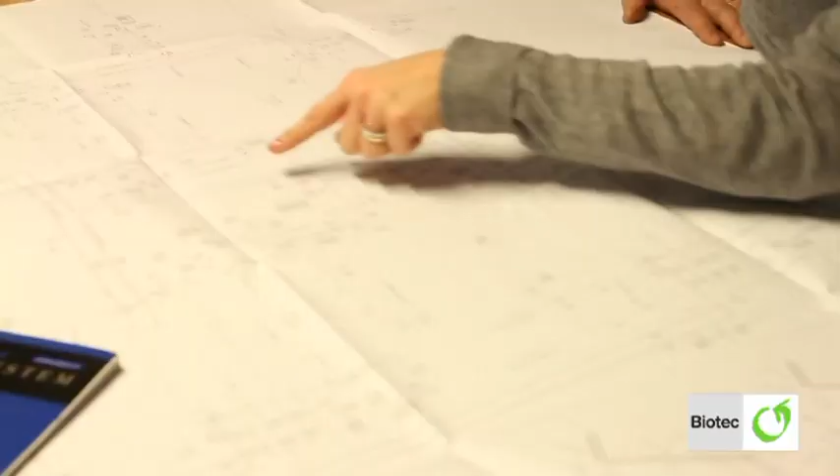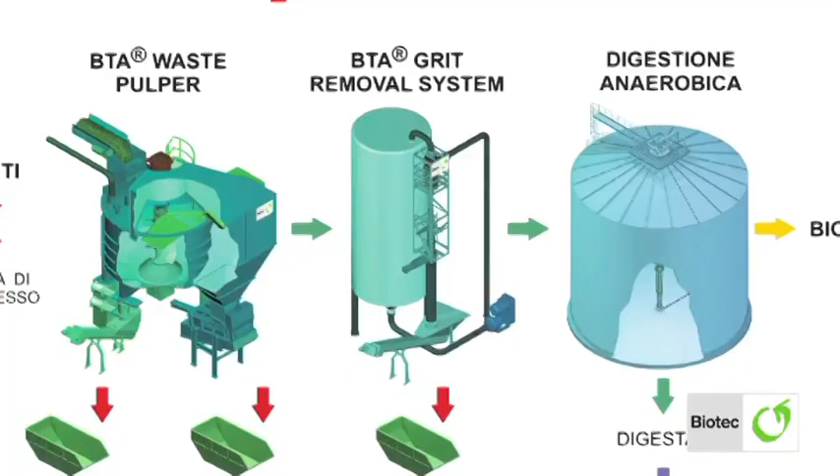Biotec Systems is a Genoa-based company which has been operating in the renewable energy sector since 1997, designing and building plants for biogas and compost production. The company's strength lies in the use of BTA technology, a patented mechanical biological wet separation waste treatment process, to evaluate the biodegradable component of waste and transform it into renewable energy and materials, thanks to an efficient pre-treatment system and the following biological process of anaerobic digestion.

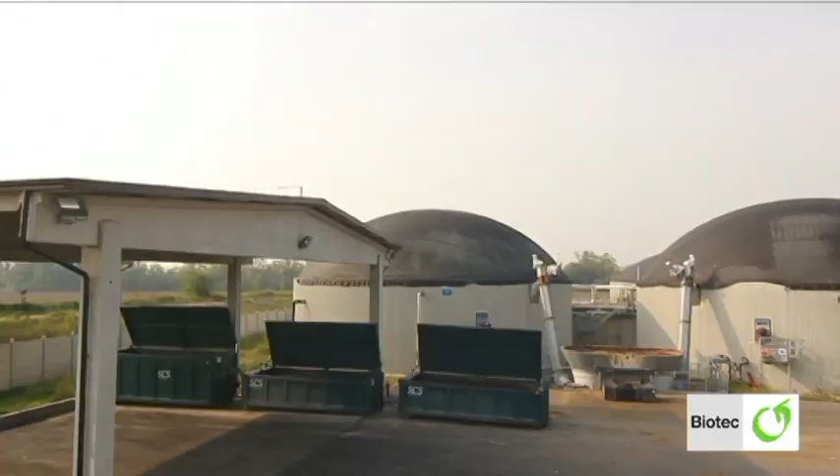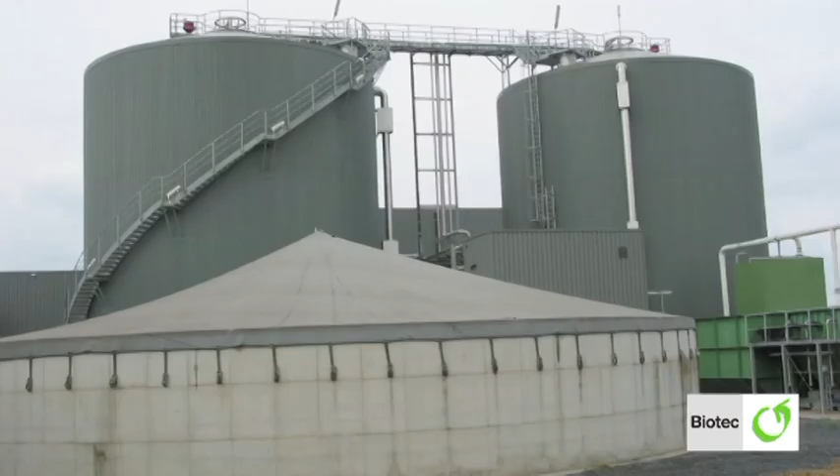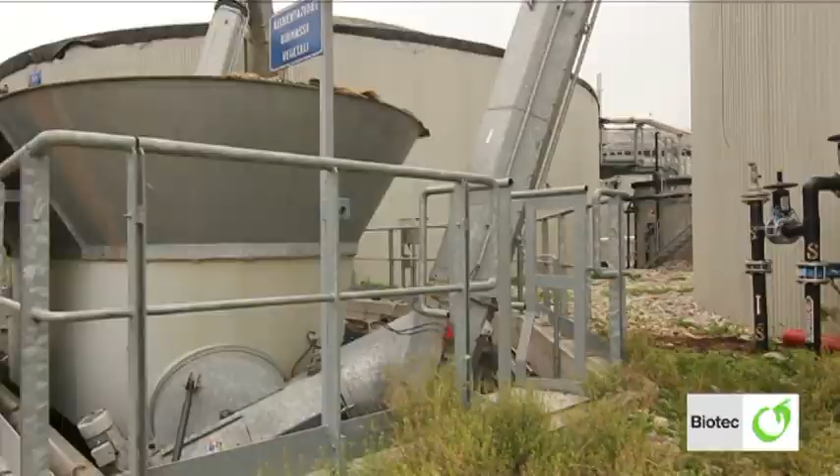Today, this technology has been installed in over 50 plants on all 5 continents, starting from Europe in Italy, Spain, Portugal, Great Britain, Germany, Poland, Belgium, Austria and Luxembourg, followed by Canada, Japan, South Korea, Australia and Libya. Together with Scamac and Ecomin, Biotec Systems is part of the BES network, dedicated to sharing resources and experience in the construction of plants and machinery, with the aim of increasing innovation and market competitiveness.

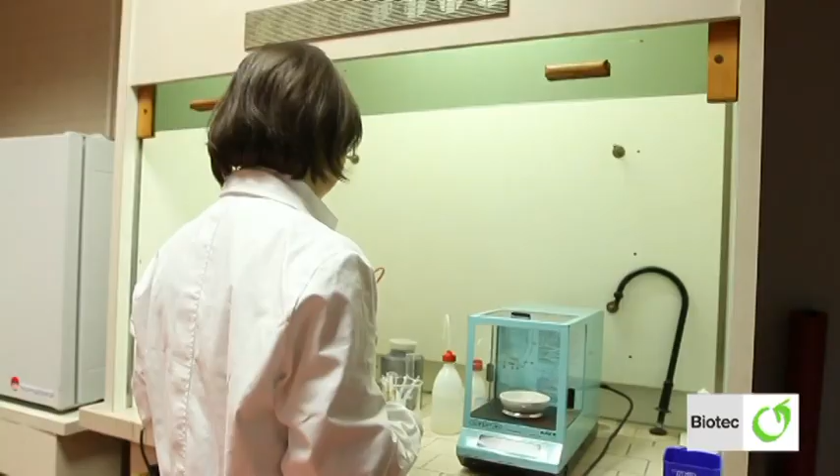Biotec Systems has developed its experience in collaboration with its BTA international business partners, a German company which made its first foray into the biogas sector in the 1980s. The close collaboration between these two companies has led to the optimization of the process, designed to evaluate the organic content of waste, which is then used to generate biogas, a mix of methane and carbon dioxide, in turn used to obtain high-quality compost and electric and thermal energy to put into the grid.

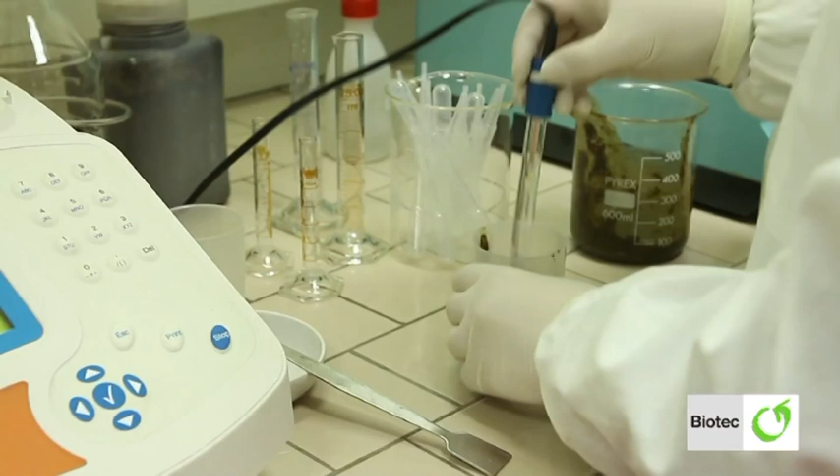In the plants designed by Biotec, together with the organic content of sorted recyclable materials, we can treat waste and byproducts from the agricultural and food sector, including packaging, from industries, butchers, markets, supermarkets and shops, as well as waste from kitchens, canteens and restaurants.

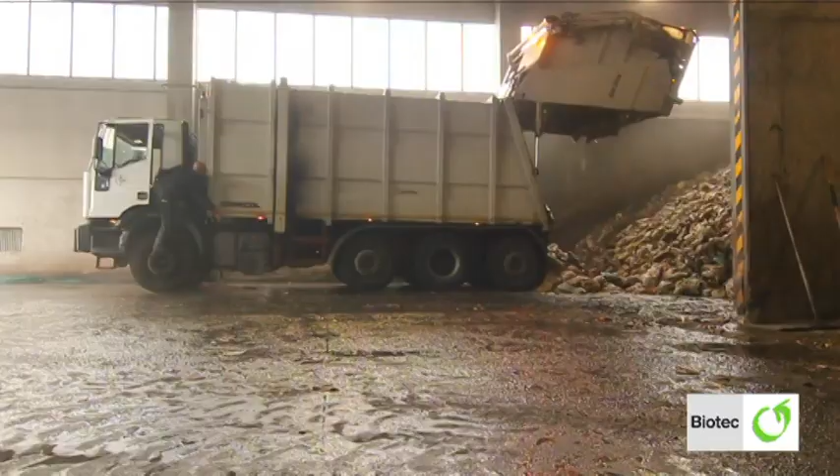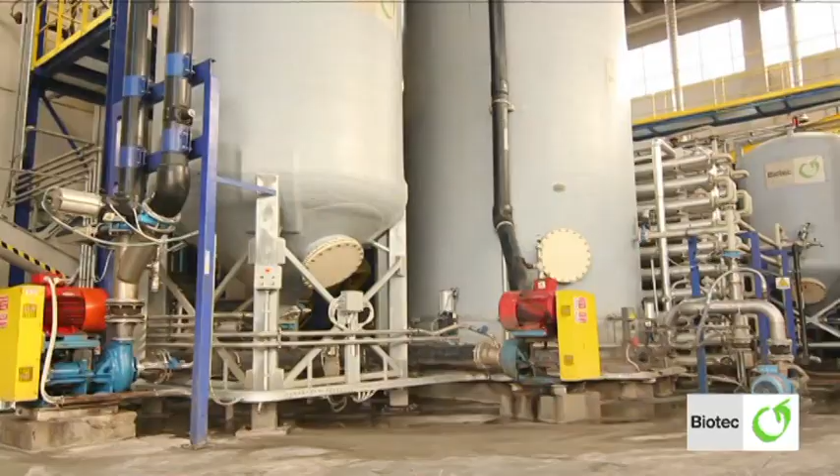To allow for an optimal production of biogas, it is necessary to precede the anaerobic digestion with a pre-treatment system to separate from the organic material the non-biodegradables, such as plastics, wood, metals, glass and aggregate composites, in order to avoid these having a negative effect on the anaerobic digestion and the efficiency of the plant.

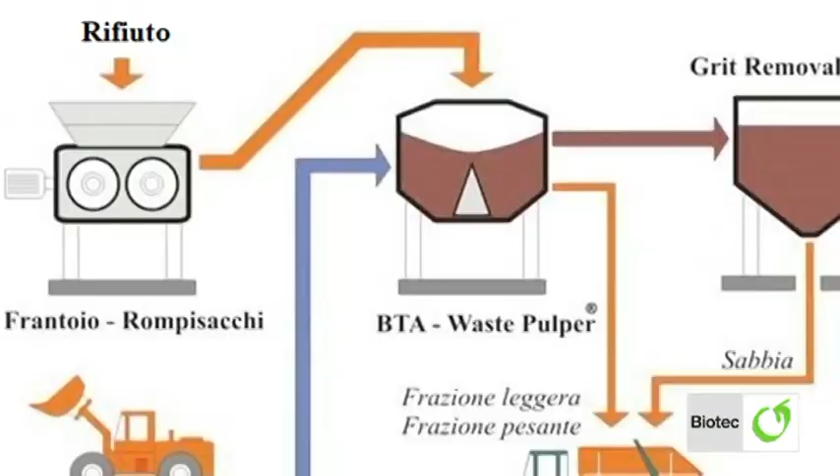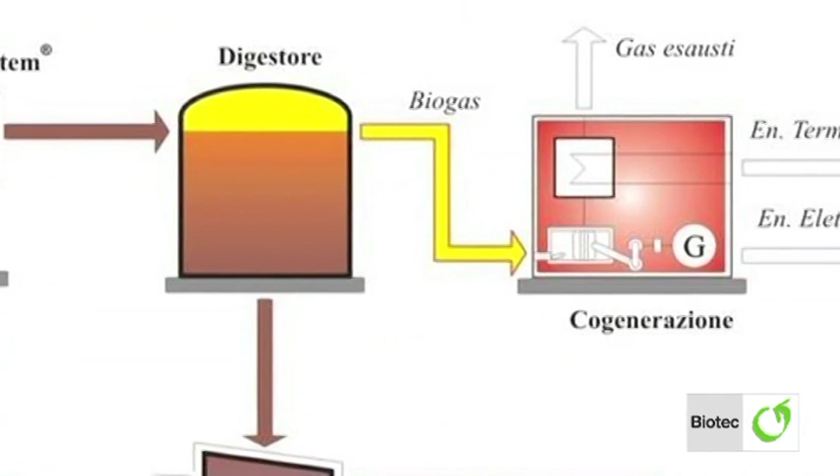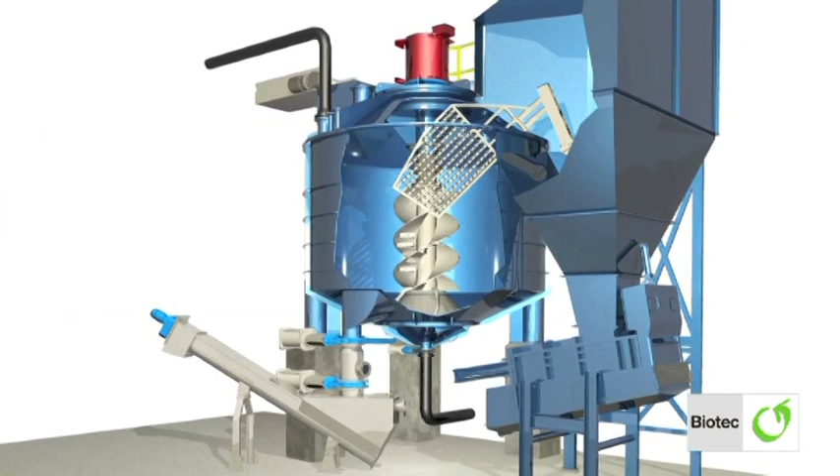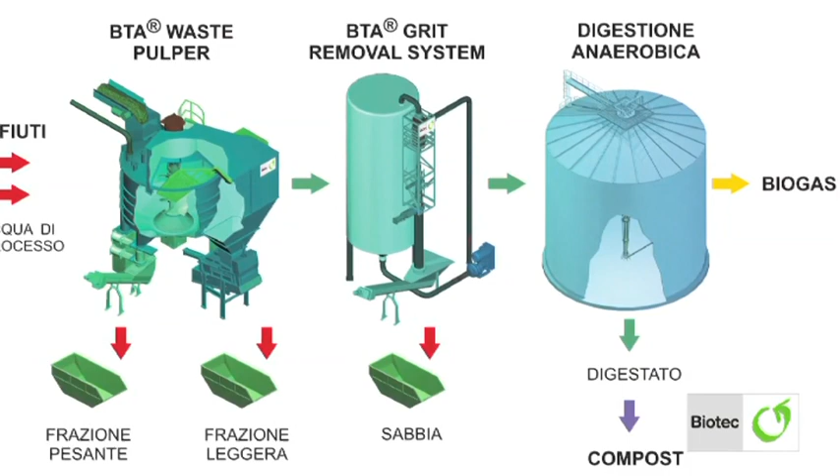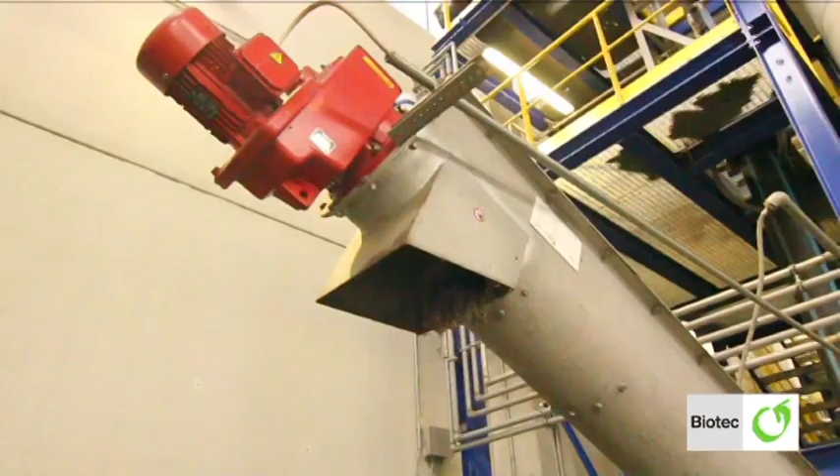An organic pulp originating from the organic part of the waste; a fraction of light materials largely made up of plastics, including plastic films, wood and textiles; a fraction of heavy materials with a concentration of aggregate composites, glass, metals, bones, stones and other high-density materials. At the next phase, we use the BTA grit removal system, a hydrodynamic separator, to further refine the separation by removing the finer parts, such as fragments of glass and ceramics and other small aggregate composites, from the organic pulp.

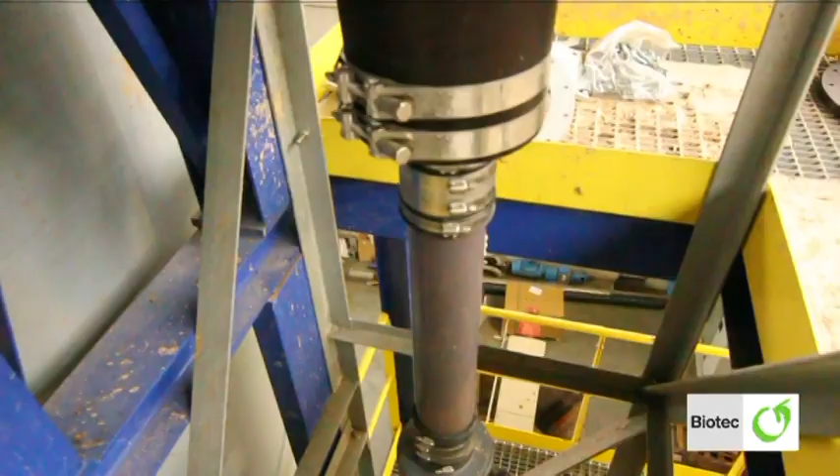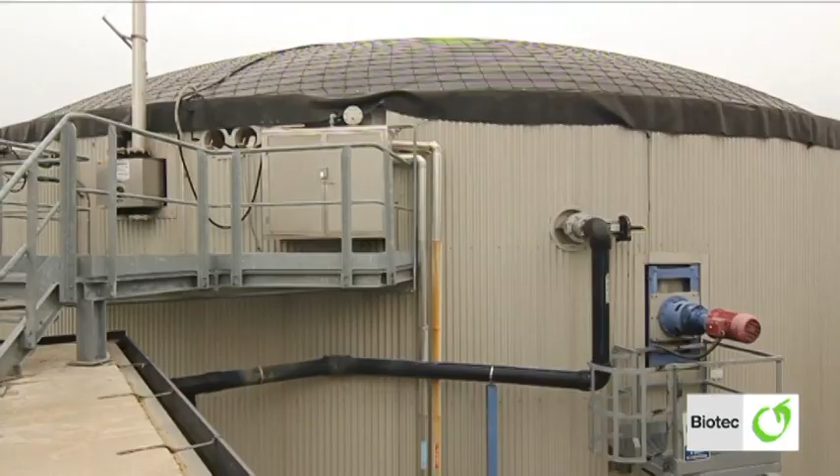Starting with a waste input from the pre-treatment phase with a non-biodegradable component of between 2 and 60%, we obtain a homogeneous product whose properties are independent from those of the waste introduced into the plant. A storage tank allows for the regular introduction of the pulp to the anaerobic digestion, with the aim of obtaining an equally regular production of biogas and energy.

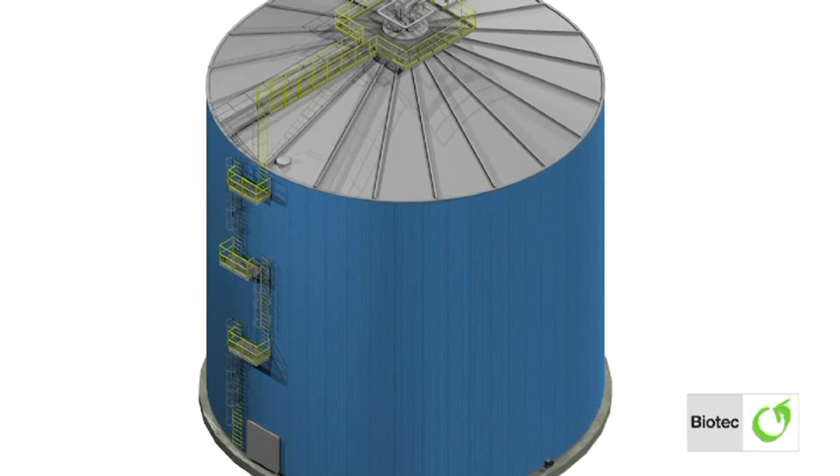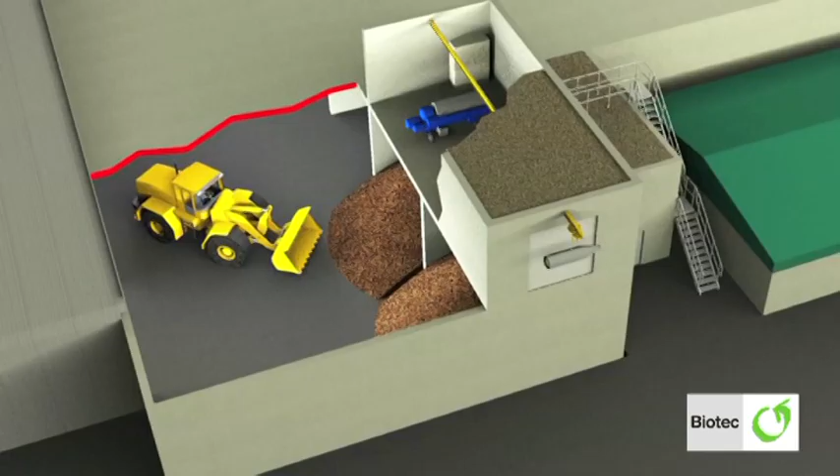The bacterial degradation to methane takes place in closed tanks. The digesters are kept at a constant temperature, generally in mesophilic conditions, and are thoroughly mixed using mechanical systems or compressed biogas nozzles to ensure a complete homogeneity of the conditions. At the end of the degradation, apart from the methane, we obtain a digestate, a stable organic residue free of impurities, which can be used directly as a soil improver or fertilizer, or, after a simple phase of aerobic maturation, be converted into quality compost to be used in agriculture and flower farming.

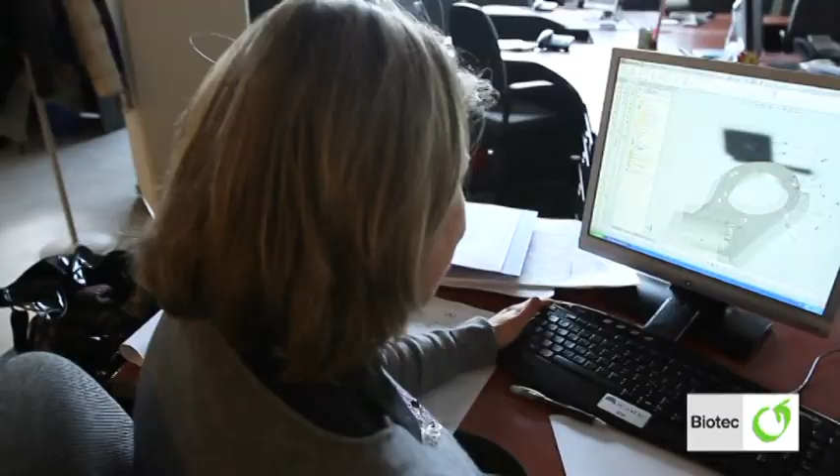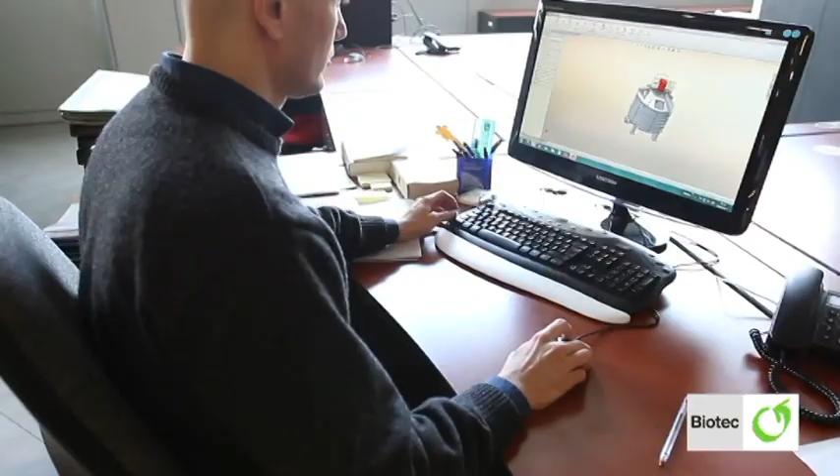The process developed by Biotec and BTA is one of the most reliable and efficient mechanical biological treatment technologies present on the market, and, as opposed to dry separation technologies, is capable of making use of the water present in the waste and recirculating the water from the process, keeping the supply of external water to a minimum.

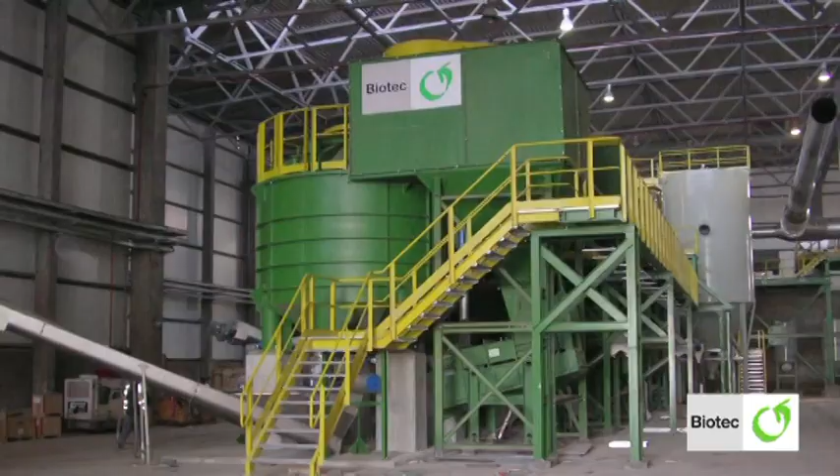The proof of the reliability of Biotec BTA's technology lies not only in its vast application in state-of-the-art plants, but also in the revamping projects which Biotec and BTA have carried out through the years on pre-existing plants and structures, replacing technologies that were inefficient from both a technical and economic point of view.

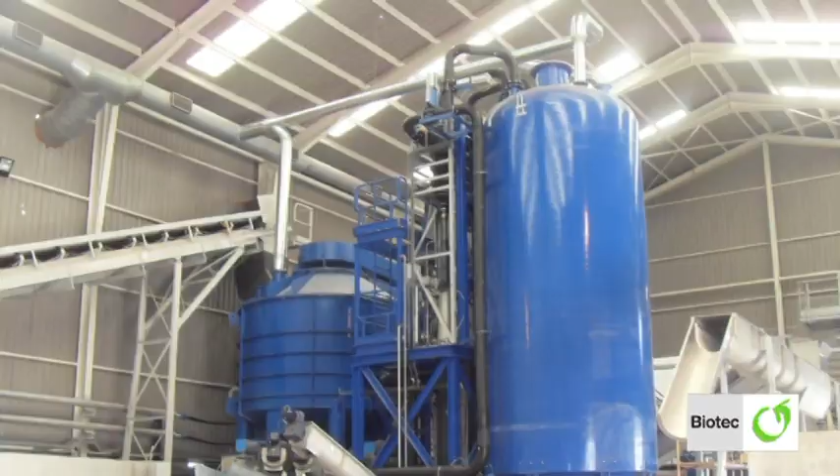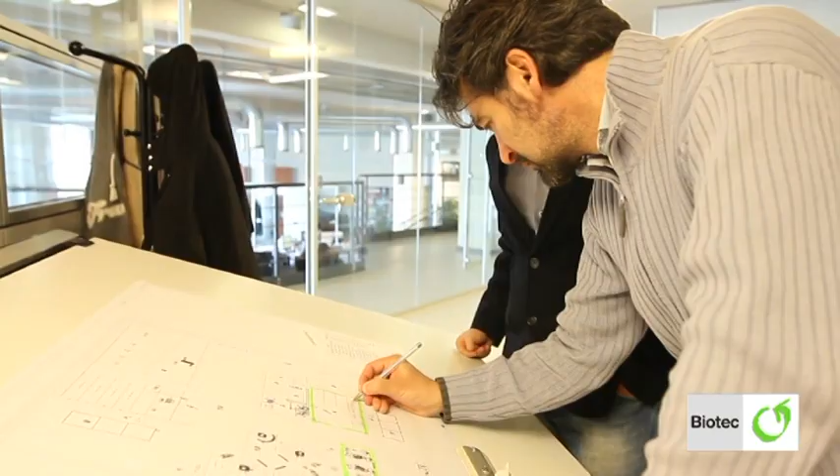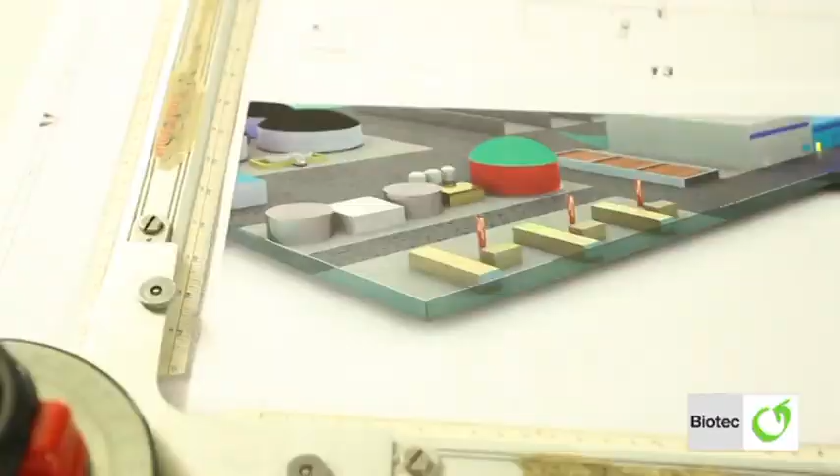Besides the plants for the treatment of organic waste, our company is also specialized in the creation of plants which make use of animal waste and agricultural biomass of various types, coming from small and large-scale companies and farms. New ideas, technologies and strategies are the instruments necessary to confront one of the biggest challenges of our time, the protection and the conservation of the environment we live in, and the improvement of our quality of life. To obtain these results, Biotec Systems invests its own resources and experience on a daily basis to develop and patent innovative and efficient technologies, which are able to reduce environmental impact and favour an eco-sustainable future.